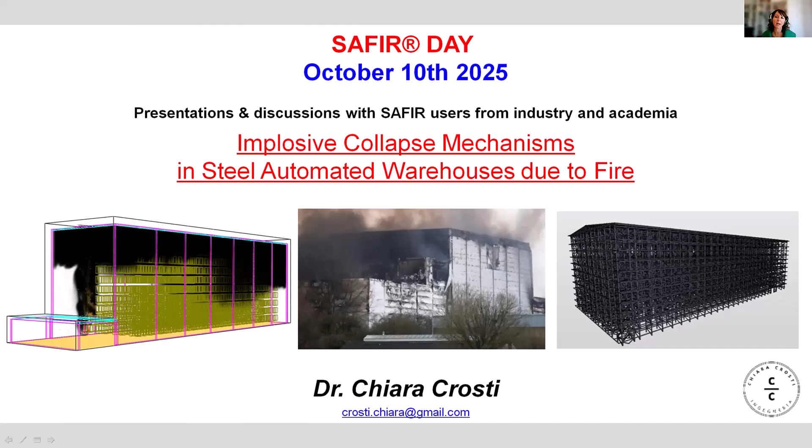I'm a fire structural engineer from Italy, and SAFIR is the computational tool my team and I have been using to perform numerical analysis on fire resistance. Today, I will present to you some results on steel automated warehouses. The results come from multiple projects rather than a single one in order to highlight their specific characteristics.

So before diving into this specific topic, I'd like to give a brief introduction to how fire resistance is assessed in Italy. In recent years, Italian fire safety rules are shifting from a prescriptive approach to a performance-based one. Under the prescriptive approach, structural fire resistance was typically defined by a single fixed value. As you can see here, there is just a number that we have to check.

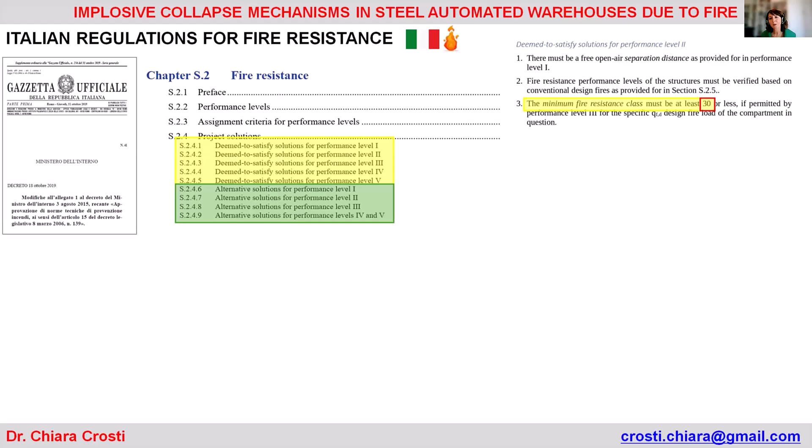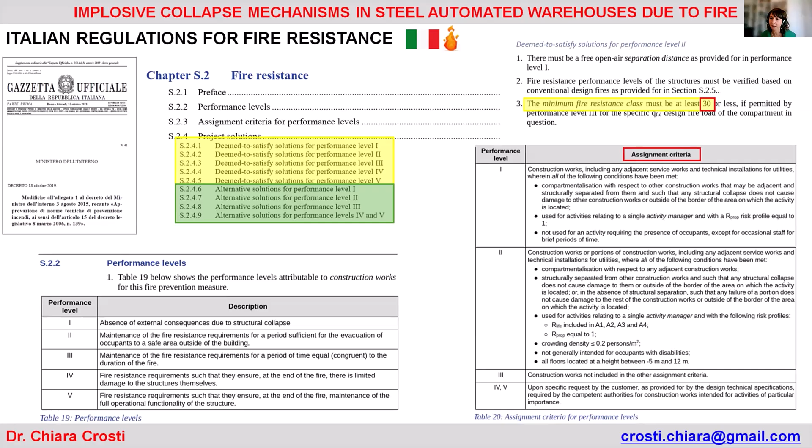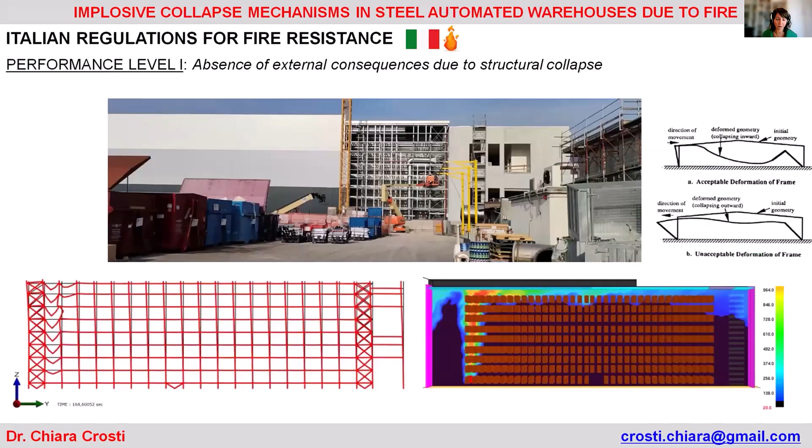When we moved to a performance-based system, designers can now select among 5 different performance levels, depending on the characteristics of the facilities under consideration. For example, level 1 focuses on the collapse mechanism. It is important to assess how the structure collapses and not when. This level is usually applied to buildings without occupants, like automated vertical warehouses, like the ones I'm going to talk about in a while.

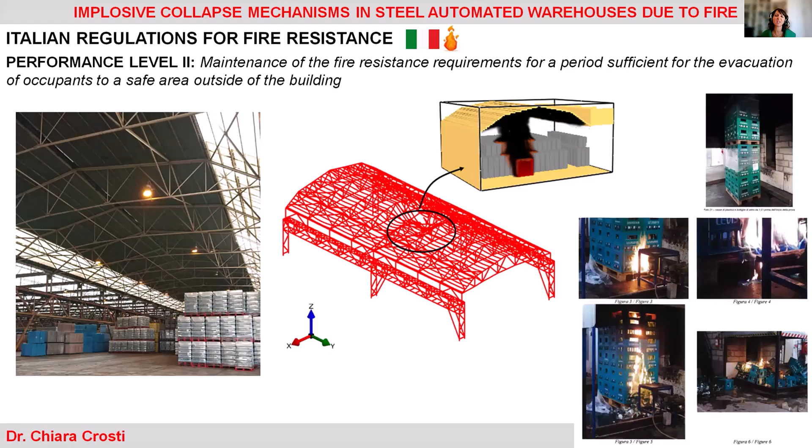Level 2 adds a very first safety check. The structure must remain stable long enough for evacuation and for emergency services to intervene, which is typical for industrial buildings. Level 3 requires the structure to remain standing for the entire duration of the fire. This level is typically applied to civil buildings like the one that you can see on the screen now. This is a structure located in Genova, in the north of Italy, built in 1939, and we were asked to assess its fire resistance.

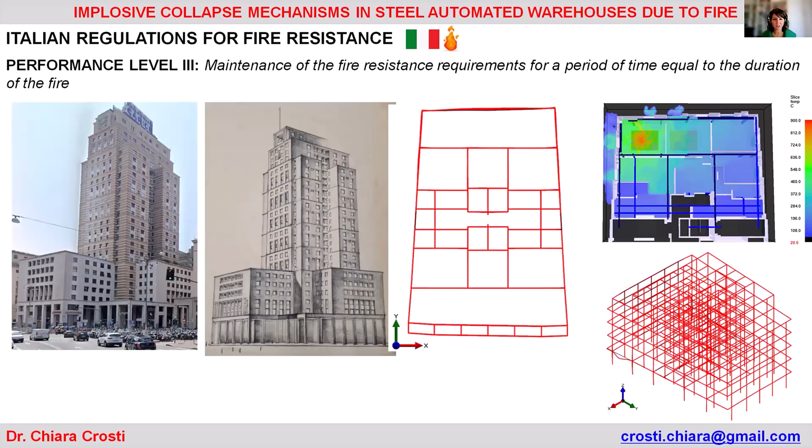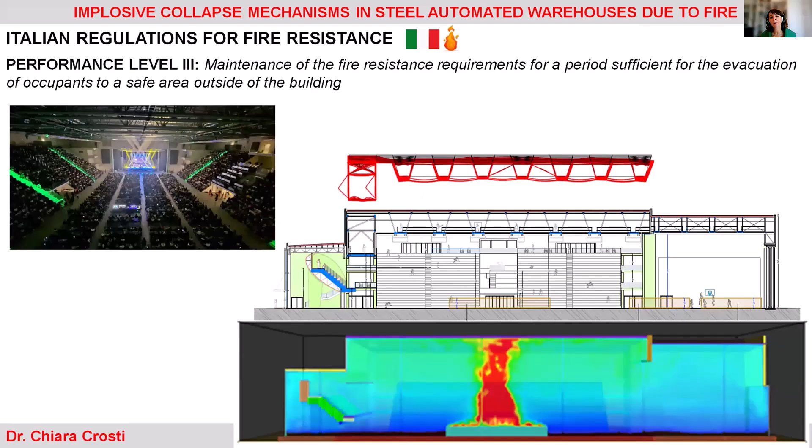Or it could be applied to a sports hall that we saw earlier, where analysis must take into account scenarios such as a concert event and the possibility of a fire, for example, coming from the stage. Levels 4 and 5 are the most demanding, as the building must stay standing and suffer only limited damage to ensure business continuity. This applies to hospitals, fire stations, and similar facilities. So we, as designers, perform our modeling using SAFIR to verify all these levels.

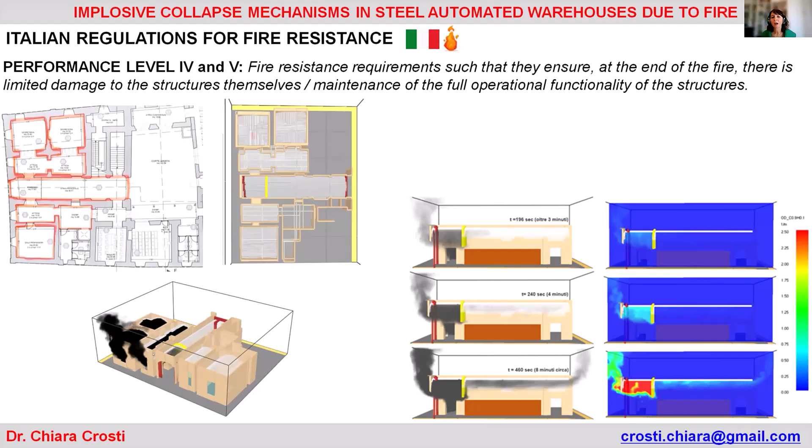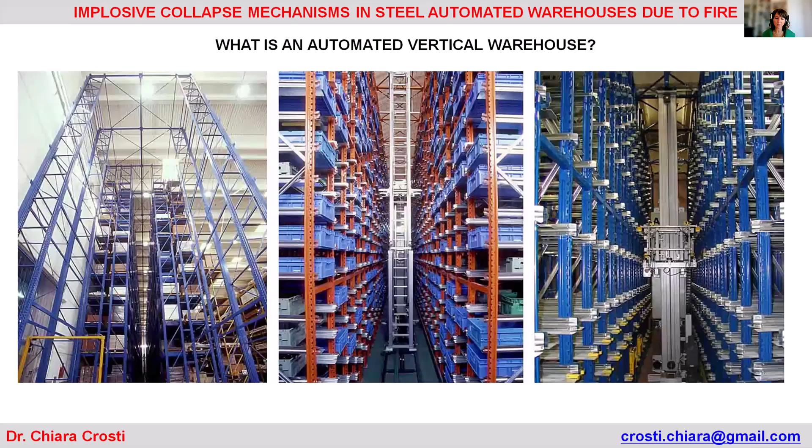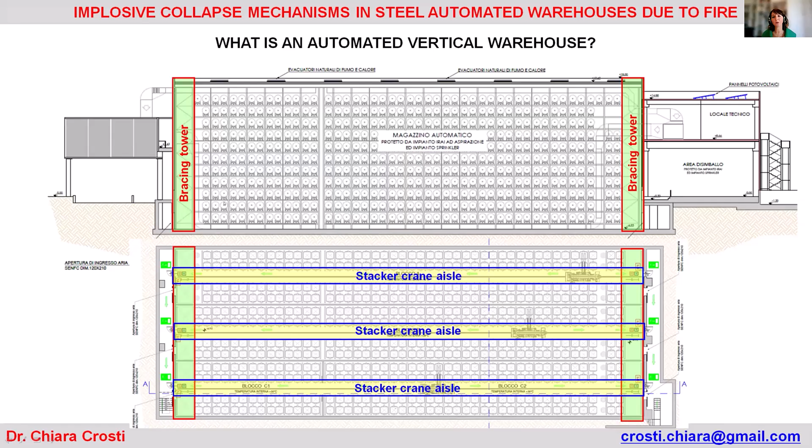We will focus now on level 1 with specific attention to automated vertical warehouses. But the first question is: what is an automated vertical warehouse? These facilities are self-supporting structures in which the main structural frame and the storage racks are integrated. Here, for example, you can see a typical longitudinal section and the plan view, which shows the main structural components, such as the lateral bracing towers and the stacker crane aisle. This figure also highlights how the combustible materials are located in the warehouse volume.

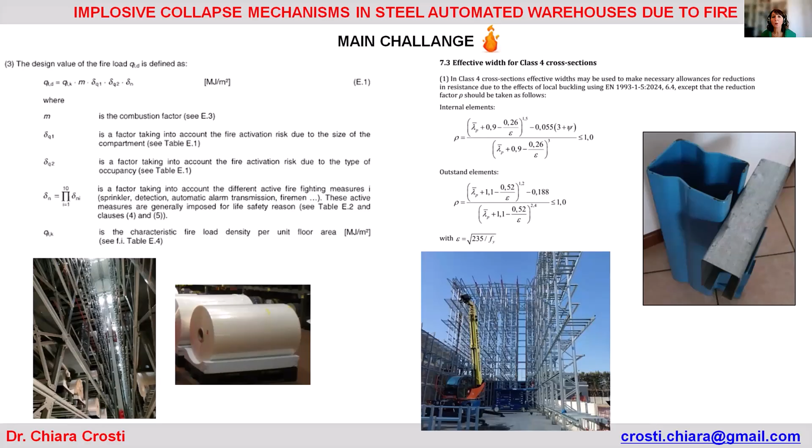The main challenge with fire resistance when we are talking about automated warehouses is that they store huge amounts of combustible materials, resulting in very high fire loads. At the same time, they are built with very slender structural elements, all classified as class 4, as the Eurocode would say, which makes them prone to local instabilities. It is pretty clear that the best way to understand how these structures behave in fire is through fire safety engineering.

The methodology that we all know identifies three main phases plus a phase zero, as we call it, which involves gathering all the information about the structure. With phase one, we can define the thermal action that we use in phase two to identify the temperature in the elements, which can be used in phase three to finally obtain the answer on the load-bearing capacity of the structure under study. So let's focus on each phase.

For phase one, we use FDS to model the warehouse as fully loaded with pallets. We all know that this won't be the case in reality, since empty spaces are needed for handling and for movement, but we decided to consider it as the worst case scenario. Each pallet is modeled as being composed of the stored material, wood and cardboard boxes, often wrapped in a sort of plastic film. Each pallet is treated as an abstraction with 6 sides, and in most cases, each side releases an HRR of 500 kilowatts per square meter.

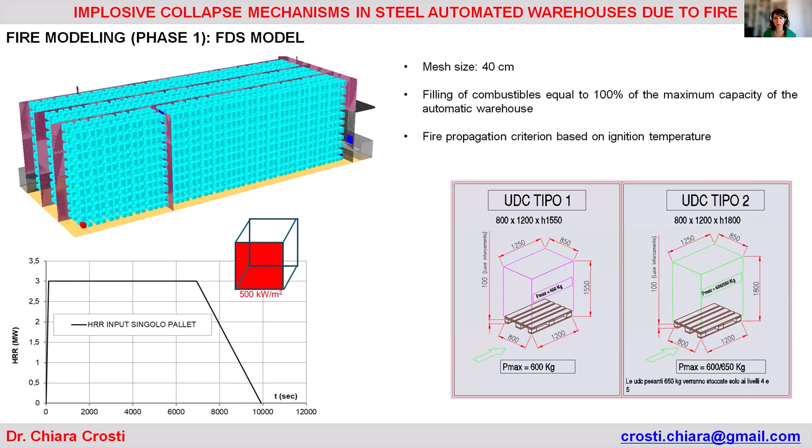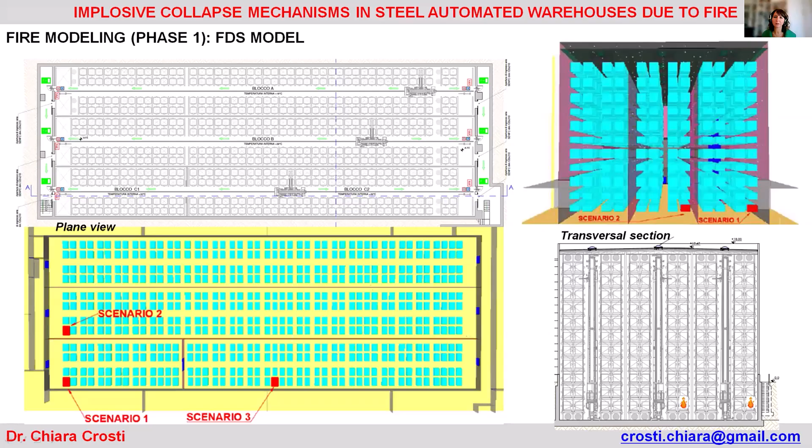This value is suggested by the Italian regulation and Eurocode 1 for materials characterized by fast or ultra-fast fire growth. The propagation is modeled using the lowest ignition temperature among the materials. Regarding the fire scenario, in our experience, we consider different possibilities, but we believe that those with ignition at the base and near the lateral areas are the most critical for triggering an implosive collapse.

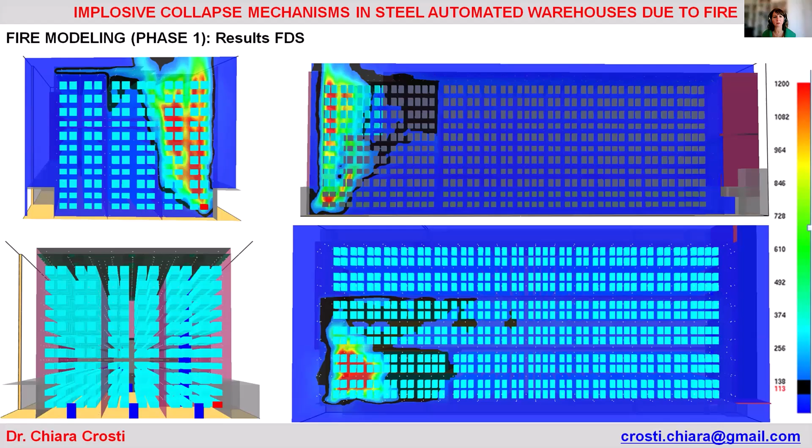From different projects, we have seen that in the first 5 to 10 minutes, the fire remains very localized. Some areas reach over 1000 degrees, as you can see, while others stay near ambient temperature. Because of the high temperatures and the slenderness of the structural sections, collapse is expected within this time frame. This means that we are actually dealing with a localized fire scenario where the cooler zones act as a rigid support for the heated areas. This is an important point that shouldn't be underestimated.

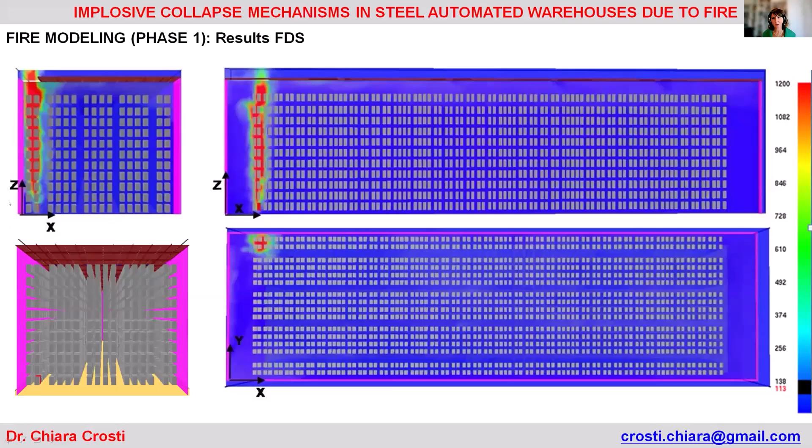Here, for example, you can see the temperature slices from FDS for different projects, where you can see pretty clearly the localized fire. Everything below the black marks has a temperature lower than 100 degrees.

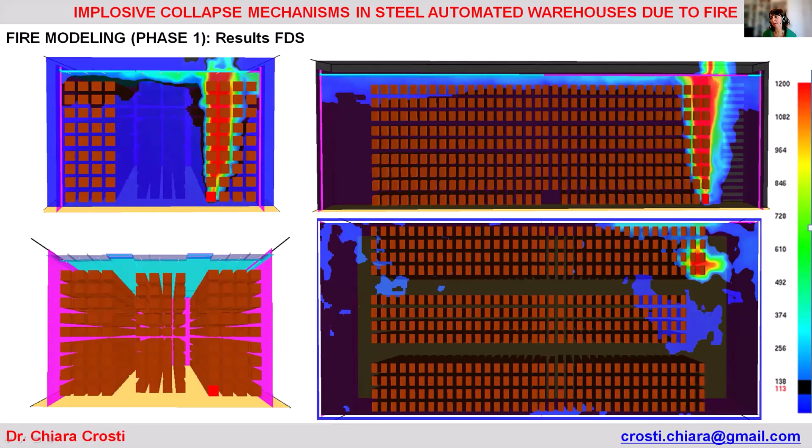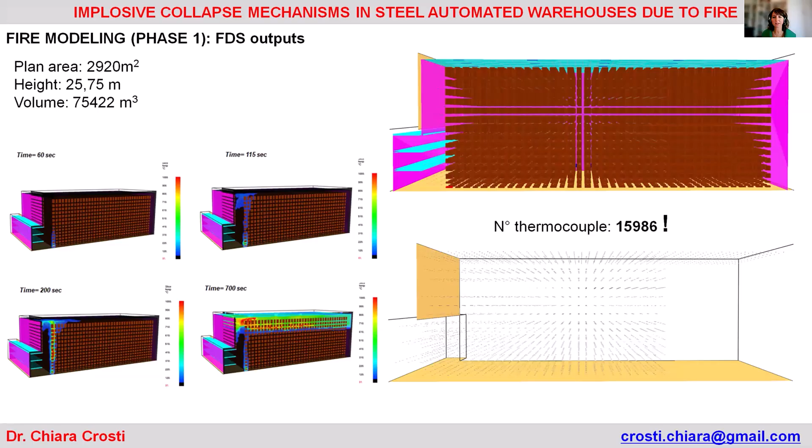So a key part of phase one is understanding and using the results from CFD models. These results, which later become input for phase two, as I said, usually come from many temperature devices, often located where the structural elements are supposed to be. For example, in this one case, we placed almost 16,000 thermocouple devices in a 75,000 cubic meter volume, which generates a large and complex data set to manage.

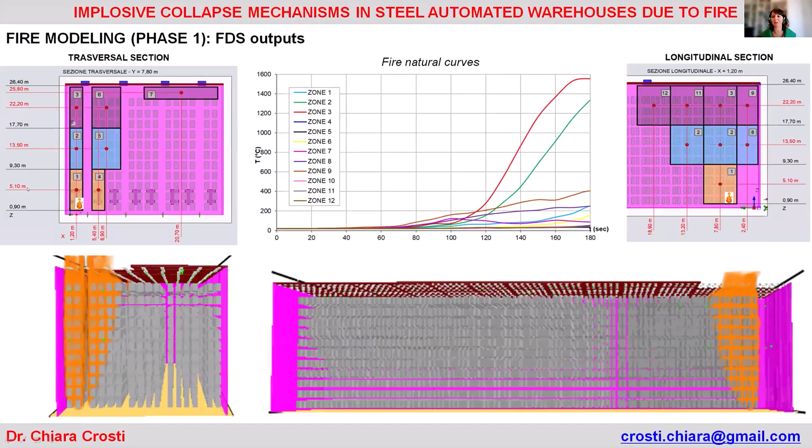So what do we do after? Basically, as designers, we choose to divide the warehouse into zones, so the same curve coming from the devices we placed can be assigned to all the elements in the zone we are considering. With this methodology, the natural fire curves are assigned manually to many elements, so it could be easy to make an error; as we are human, the probability is pretty high. On the other hand, the results from FDS can be transferred to SAFIR using the interface file.

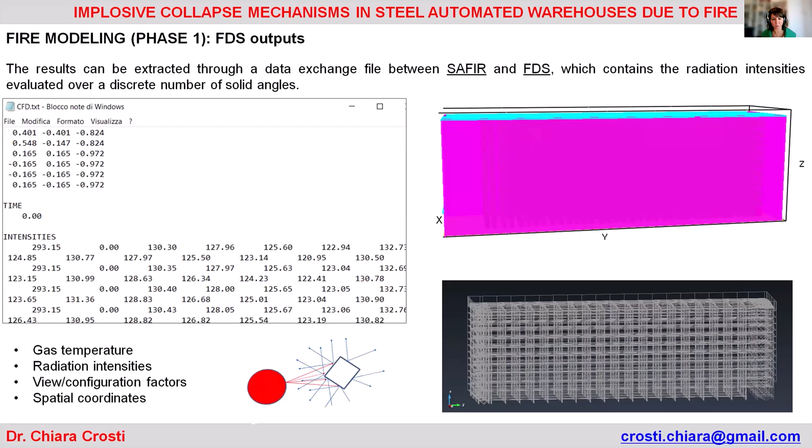This file contains the radiation intensity calculated in different directions. This approach allows SAFIR to create a more detailed and accurate temperature field in the structure because it automatically considers the spatial and temporal variation of the fire, the geometry and orientation of the structural elements, shadowing effects, and configuration factors. For this method to work correctly, the computational domains between FDS and SAFIR must match very well. So these analyses are highly demanding. They require careful setup, technical expertise, and, let me say, a lot of patience from the designer, because we really need a lot of passion to do it.

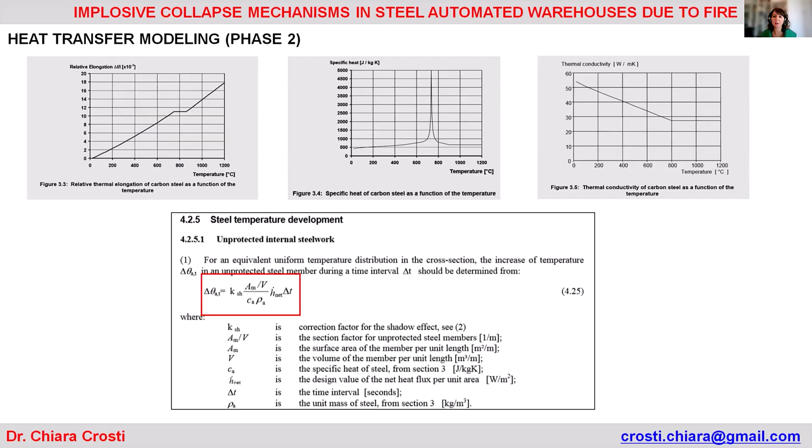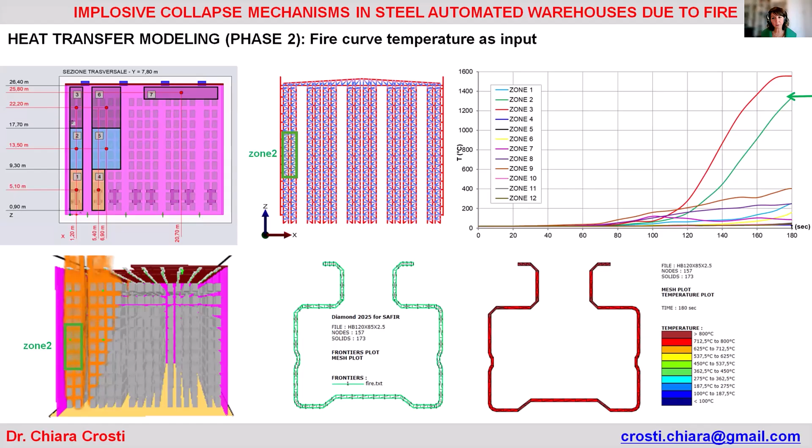Moving on, we have a look at phase 2. Basically, what we do is the thermal analysis. These thermal analyses are performed using the thermal properties specified in the Eurocode. If we consider the fire curve temperature as input and apply the curve to the frontier, for example, of the vertical column belonging to zone 2, we can see that the temperature, as we were expecting, seems to be pretty uniform. That is because in this analysis we are not considering where the fire and the elements are located. Plus, we don't consider any shadow effect nor the configuration factor.

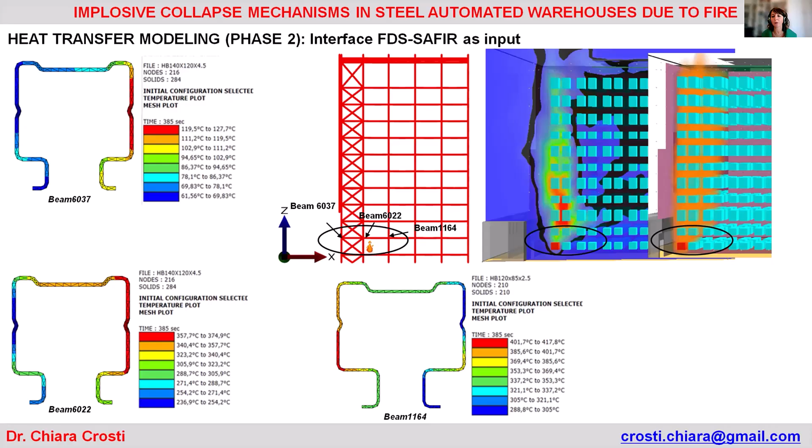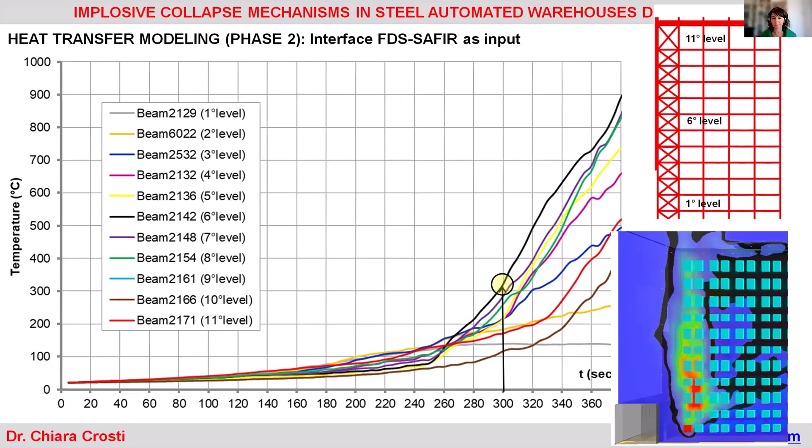We can also, for example, assess the temperature differences of the most heated beams on different load levels. For instance, after 5 minutes, we can see that the highest temperature is reached by the beam on the 6th load level.

Moving on to phase 3, the structural model was then developed. We know that we are dealing with a localized fire and very large volumes, so we are aware that the computational effort is pretty high. So what can we do to reduce this? We decided to create a submodel. For each scenario, in this case study, we select the area where temperatures exceed 100 degrees, and we apply constraints where the structure is removed. We also define appropriate releases between the individual members to take into account the actual degree of connection between the various elements.

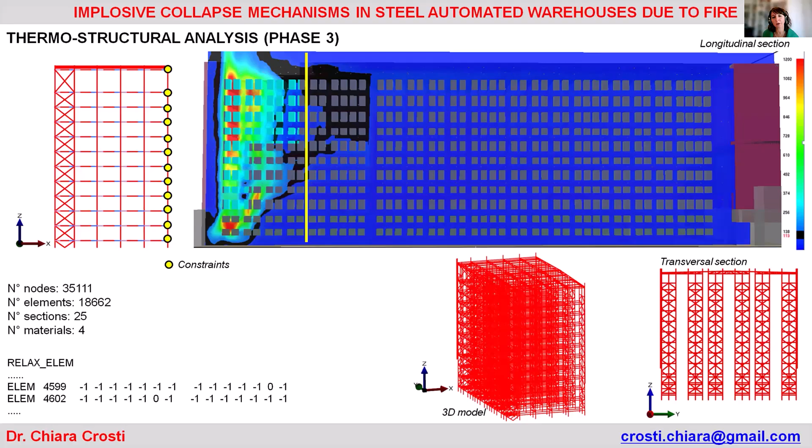Another important aspect, which at this point of the presentation should be pretty clear, is that all the elements are classified as class 4 according to the Eurocode, so these elements can become locally unstable. The best way would probably be to build a full structural model with plate elements to capture this behavior, but it's too complex and computationally very expensive.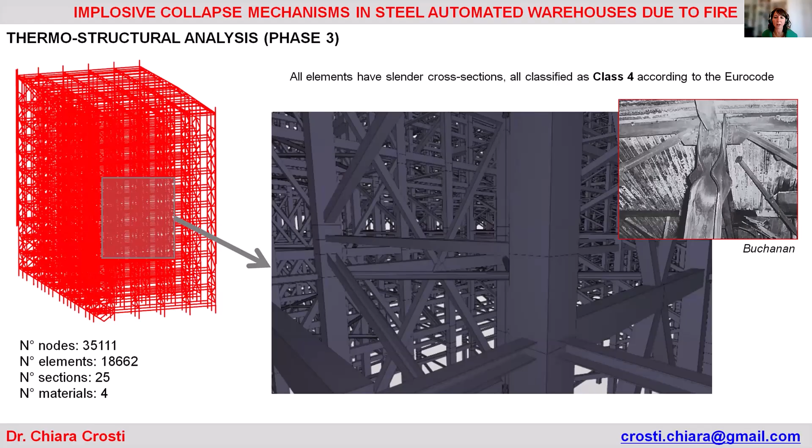On the other hand, we have to take into account this aspect. Otherwise, all the efforts we made so far, such as, for example, the determination of the thermal action, would be ineffective. So in SAFIR, there is a simplified method to reproduce this behavior and the effect of the class 4 slender elements under fire. We consider a material called steel SL that has basically an asymmetric constitutive relationship, modified essentially only in the compression part in order to be able to take into account any local instabilities.

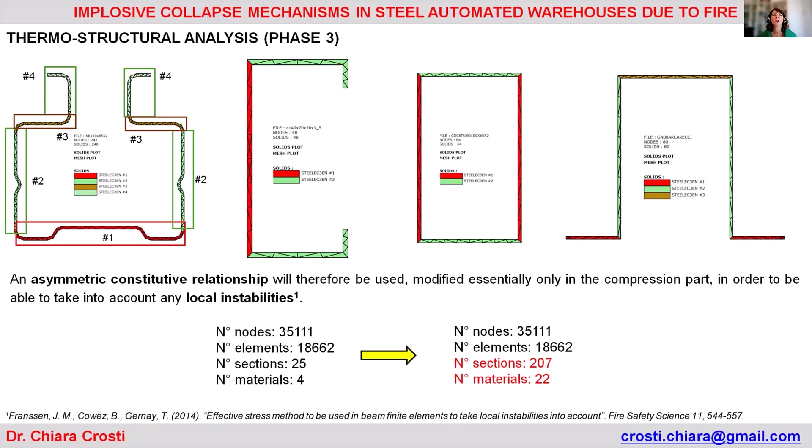So, for example, if we look at the section of the vertical columns, we are actually modeling the section as if it were made of 4 plates with different slenderness, and therefore 4 different materials. So while before we had like 25 sections and 4 types of materials that only differed in strength, now we have more than 200 sections and 22 different types of material, which differ not only in strength but also in slenderness. So the model is getting a bit complicated.

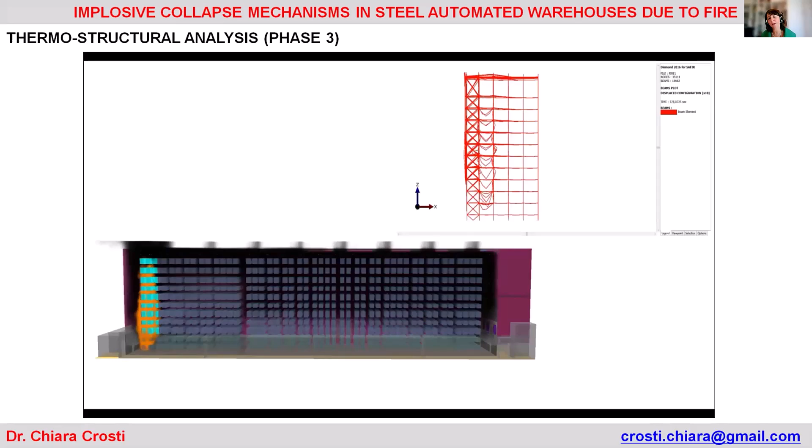By performing nonlinear dynamic analysis, it is possible to observe the correspondence between the traveling fire and the progressive traveling failure of the structural element, which is really helping us. And with the new version of SAFIR and the new version of the post-processor Diamond, it is now possible to visualize also the displacement trend and also the velocity of the movement of the structure, which are drawn as arrows, which indicate the direction of the movements of our structure.

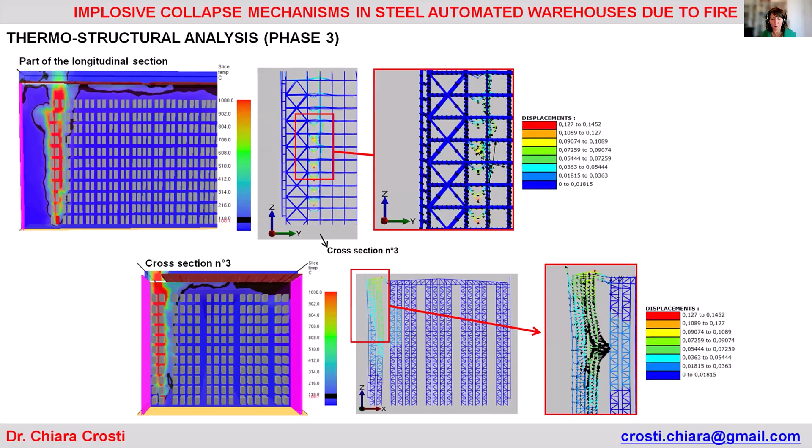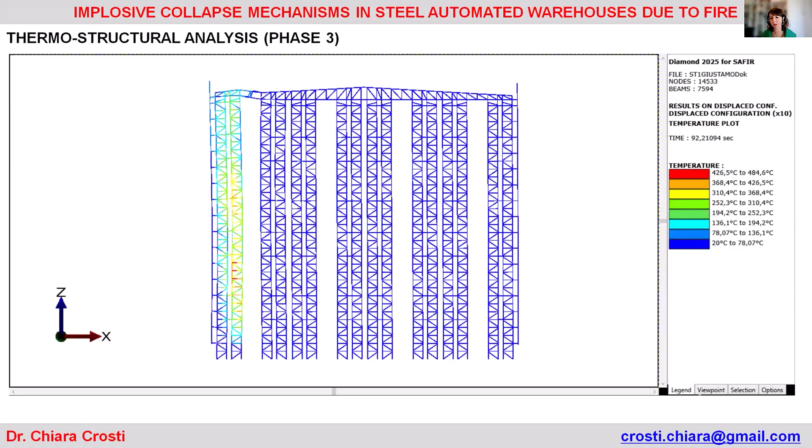We can also visualize the spreading temperature linked to the deformed shape of the structure. This is pretty impressive, in my opinion, because it shows us the way the temperature is moving in the volume. And here we can see just one transversal section for a better visualization.

But we don't have to forget that our goal is to evaluate whether the collapse shows a tendency toward implosive collapse. So one of the best checks that we can actually do is plotting the vertical displacement of the beams' mid-span nodes at different load levels, along with the horizontal displacement at the nodes located at the beam-column joints at each load level. So the figures highlight the pretty well-known, let's say, runaway trend for the vertical displacements,

which progressively shift downwards. For the horizontal displacement, instead, we can see that some curves display a sort of change of direction near the end of the analysis, suggesting a potential inward collapse. So after the initial expansion, the displacement reverses, indicating that the columns tend to follow their horizontal elements as they collapse toward the center of the warehouse. This behavior represents to us a tendency toward the implosive collapse.

By plotting also the axial forces of the beams, we can see that they first go into tension due to thermal expansion, then gradually shift to compression. So since expansion is restrained by columns, by the lateral bracing towers, compressive stresses build up. As stiffness decreases, the columns move back, and the beams switch from compression to tension, activating the well-known catenary effect.

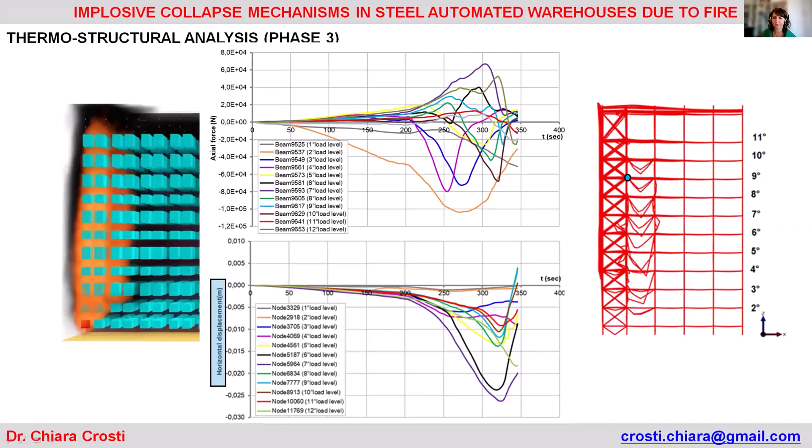So ideally beams fail first and pull the columns down. But we have to say that this is the way it's supposed to be only if the connections hold. So for example, here we focus on level 3 and 4, and we can see clearly that in a fire, connections face extra stresses from restrained thermal expansion. And these extra stresses are not usually considered in the cold design.

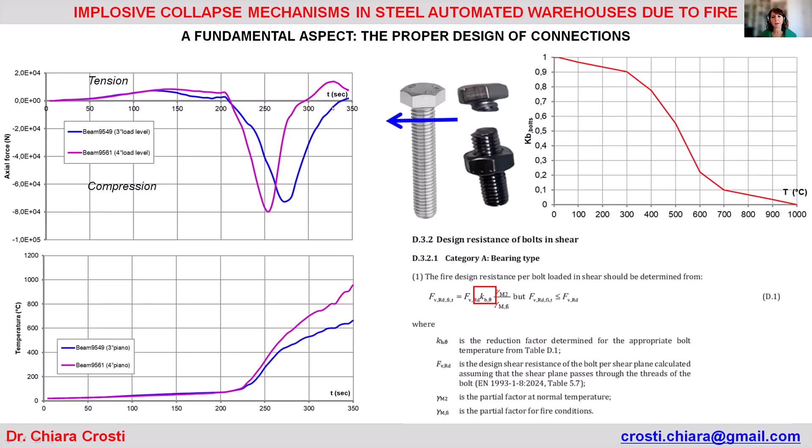So, for example, a beam hinged to a column can develop the catenary action. So the connection must first resist tension and then compression and then back to tension again as the heated beam loses rigidity. So connections are usually assumed to have the same temperature as the attached structural members, which is pretty conservative since they heat more slowly due to the larger thermal mass and the shielding.

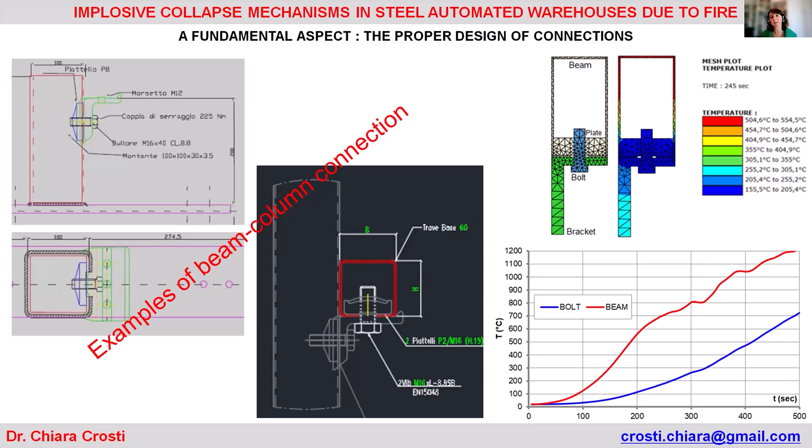Anyhow, we have to say that if a connection passes verification under this assumption, for us, designers, everything is safe. Otherwise, we need, and we did actually, create a detailed thermal model of the joint in order to define local temperatures, which are often lower than the beam's average temperature.

So in conclusion, I think it is important to mention that the computational time required for this analysis is pretty high. So leaving aside the FDS model, we are aware that running this simulation takes time, but we are considering all the sections as class 4 sections, and we are really able to model the propagation, the traveling fire, using the FDS and SAFIR interface. So just to have an idea, to run like 3 fire scenarios, it took us almost 1 month, 1 month and a half.

We know that it's pretty high, but we are confident that it is the correct approach. And these results are really showing us what is truly happening in such facilities.